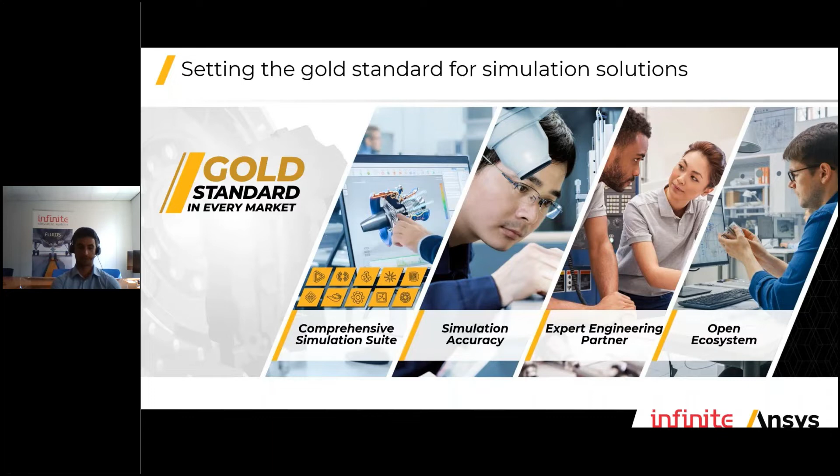So when you think of simulation, and that will be, I think, a recurring theme today - in the past, simulation was maybe seen as something you would do at the very end of the development of a product, or something that would only be dealt with by a couple of people with a very solid background in that specific domain. Whereas today, simulation is being used more widely in the product development process. It really starts at the ideation phase with some mid-end simulation technology that allows engineers to already understand how a product will perform, even if it's still in an ideation phase, which helps develop products better earlier in the process.

Typically, if you would do a simulation at the very end and see that something is wrong or you need to change something, the cost of that change will be very high, because you've maybe already spent some weeks developing it, or maybe you've already built a prototype. So simulation can really give some insights earlier on that you might not have had before.

Also towards the operation of a product, when a product is already manufactured and is in service, you see that more and more companies are leveraging analytics with measurement data, with sensor data, to be able to use that data from the field to couple it back to their simulation models, to predict how the actual product will perform in the field.

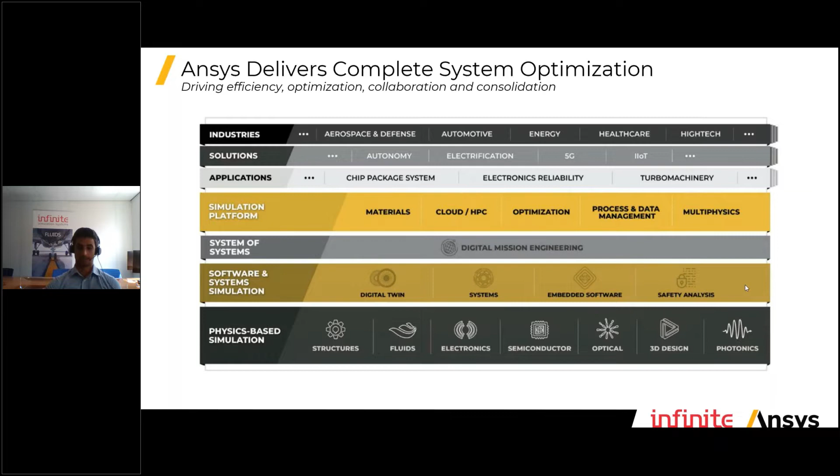There it is. Now zooming into the second tile, which is CFD, and I guess most of you know what CFD is, but maybe bringing it back to the basics. CFD stands for Computational Fluid Dynamics, and is basically the science of predicting fluid flow, heat and mass transfers, chemical reactions, and these kinds of phenomena.

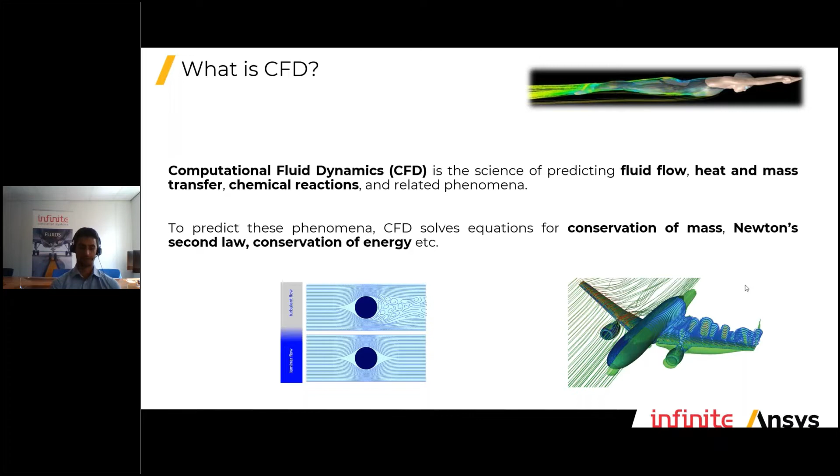We do that with computer simulations, with software, and basically with these types of simulations, what you're actually doing is solving a set of equations, which can be conservation of mass, second law of Newton, conservation of energy, etc. And with that, you can tackle a whole range of applications.

Distribution of multiple phases when dealing with multi-phase applications is another area where CFD can play an important role. Also looking into chemical reactions and combustion processes, for instance in the process industry, CFD is used a lot to understand how these reactions take place, and for instance, how pollutants are emitted or how you need to capture those pollutants.

CFD, as I mentioned at the beginning of the presentation, is not only used at the very end of a design to validate it, but it's being used more and more in all the different stages of the engineering process, of the product development process.

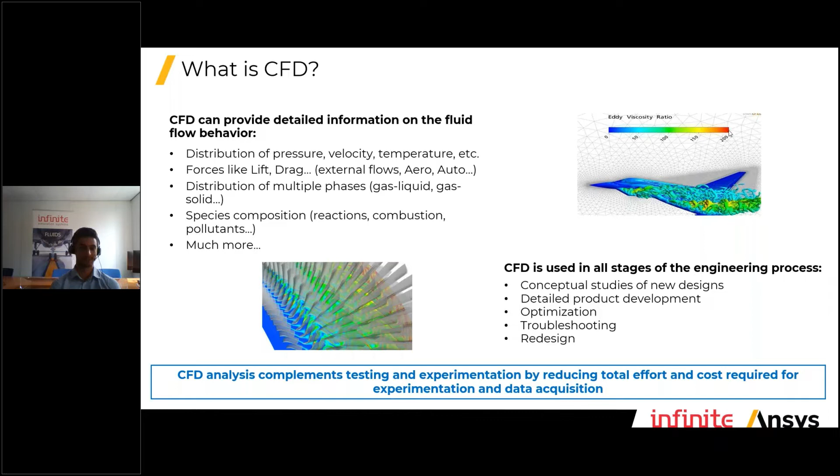So now, yeah, I can manage. Yeah. Thank you. Yeah, you're welcome.

So, how CFD pushes the boundaries in industrial applications. Adrian and Erna have been so nice to give an introduction, so I will not spend a lot of time introducing myself.

I studied civil engineering at KU Leuven. I did also my PhD in civil engineering, building physics, and after a postdoc in Montreal, I applied for a job at Eindhoven University of Technology, where I've been working now, I think, almost 16 years, and still happy to work there. I'm also now part-time working at KU Leuven.

The objective of this presentation, it's also the question I got, is to tell something about the power of computer simulation for a wide range of applications. What I would also like to demonstrate is that although scale-resolving approaches are intrinsically superior to steady RANS, steady RANS, and sometimes unsteady RANS, are still the most applied method.

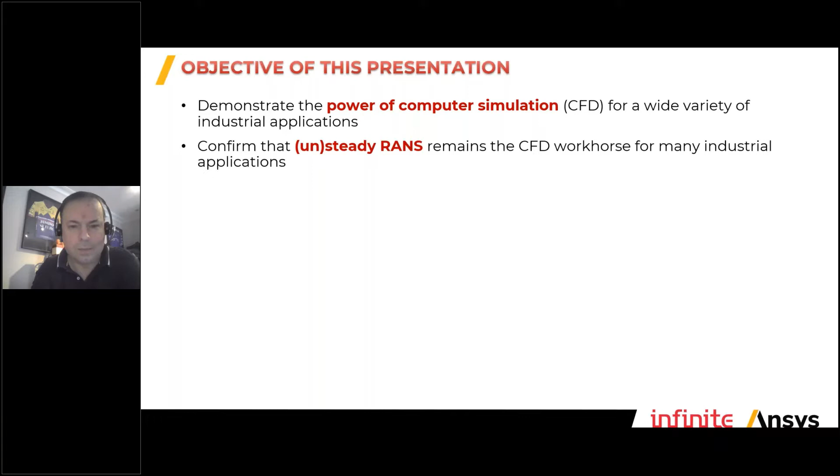And I'll have a list of applications that I'll run through together with you, starting from the ventilation system for a Duvel beer brewery and then ending up with some cycling applications. The ones you see here in blue are performed with scale-resolving simulations, and the ones in black are performed with RANS simulations.

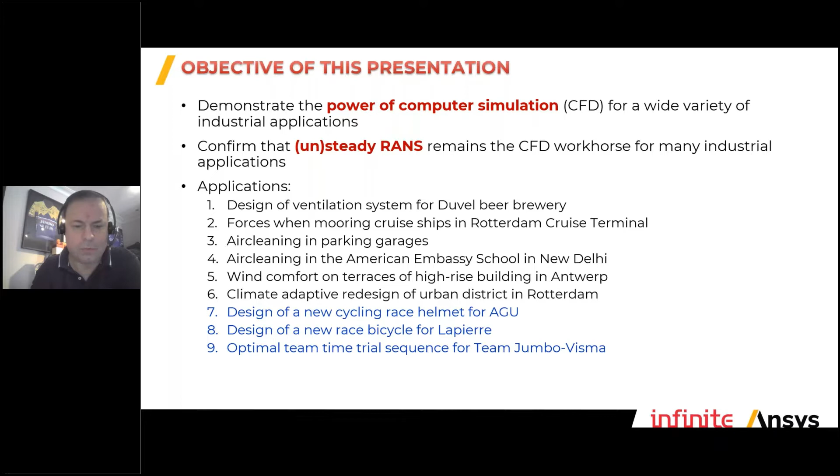I would like to start with a quote here, and I think this is a very nice one: How can it be that mathematics, being after all a product of human thought independent of experience, is so admirably appropriate to the objects of reality? That's really true, huh? Because mathematics was invented by us, by people, and it's surprisingly accurate often to predict real things.

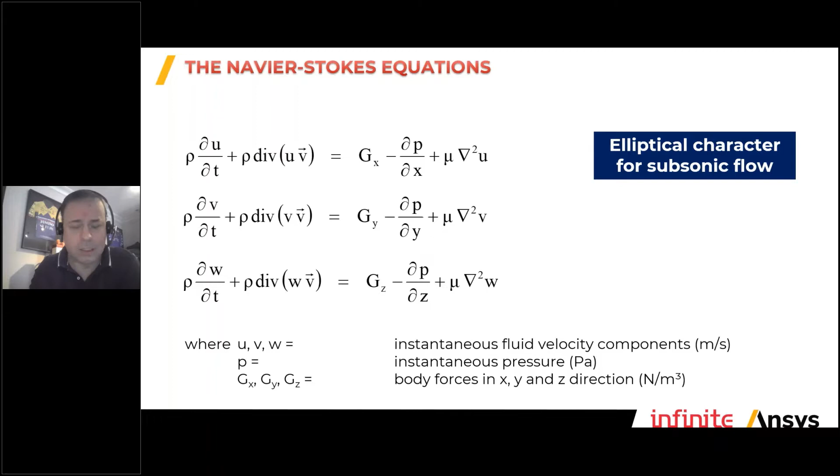I often tell my students that this is one of the most beautiful things they will probably ever see. These are the Navier-Stokes equations. They fit on one slide. It's a simplified form because this is for an isotropic homogeneous Newtonian fluid, but nevertheless these equations can predict a wide variety of fluid flow processes, whether it's the air in your respiratory system, wind flow around buildings, or the flow of blood in your veins, all predicted by these equations, fitting miraculously almost on a single slide.

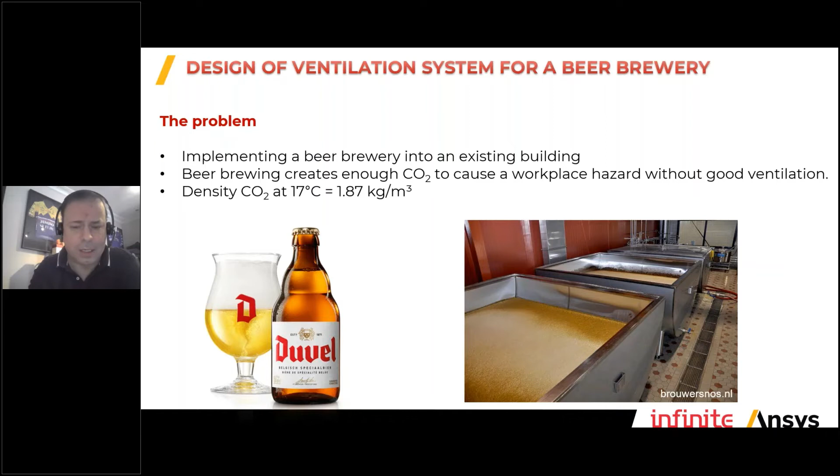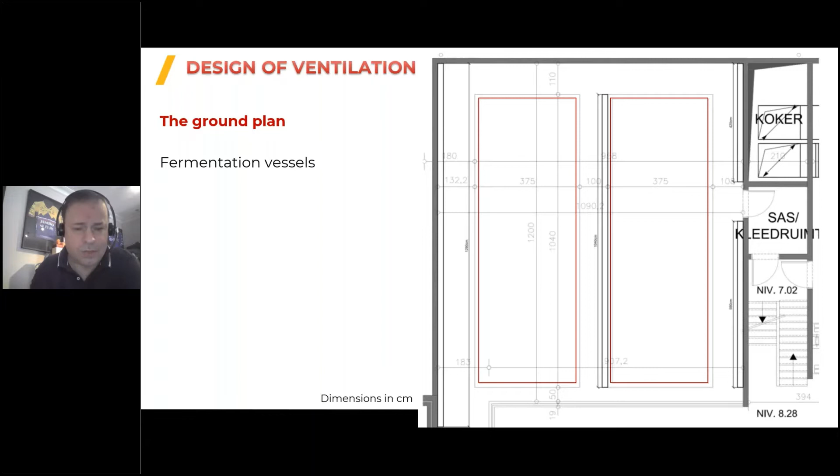Simulations were made here, nothing too fancy - steady RANS simulations with the SST k-omega model with proper boundary conditions in terms of heat generation and CO2 flux. Specific conditions were analyzed: different temperatures, also different inlet velocities, resulting in different ventilation flow rates.

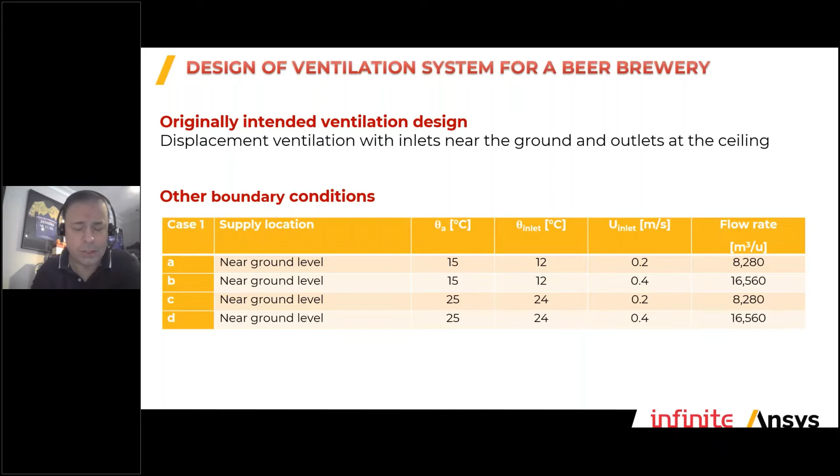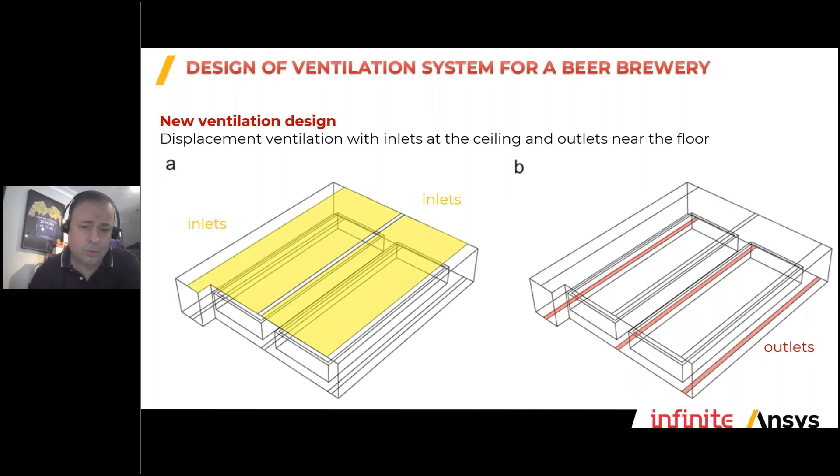So this would not be a good ventilation system, and knowing that CO2 is heavier than air, it's not surprising that with this kind of ventilation system you cannot really expel the CO2 properly out of this room. Another case is the reverse - also displacement ventilation, but from the ceiling down to the floor, which makes more sense given the density of CO2. This is an extreme case where we would be able to have very large inlet planes - very difficult to achieve in reality, but let's just look how far we could get here.

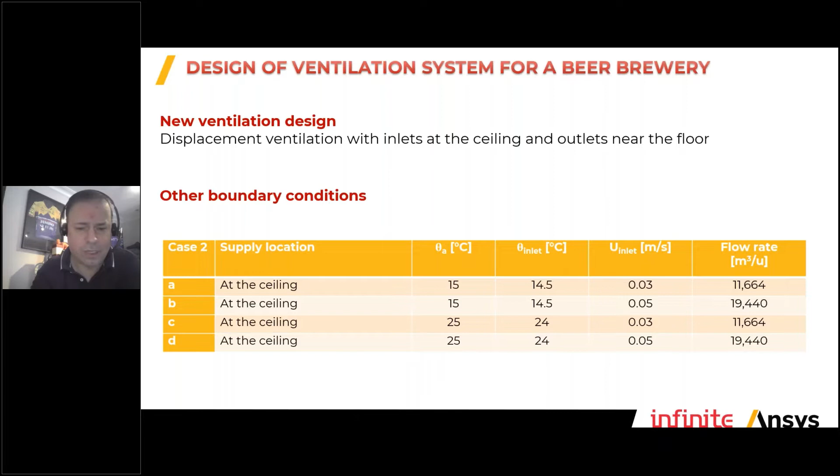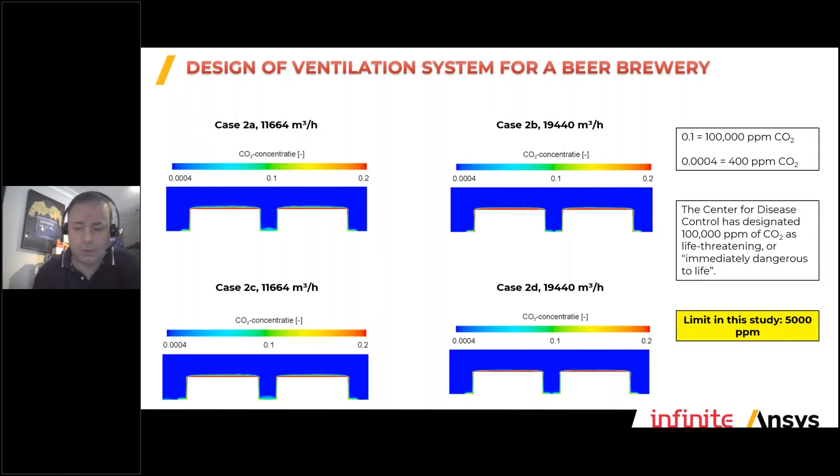Again looking at different configurations, different inlet velocities, flow rates, and so on. Here you get actually the opposite situation - very low concentrations. But as I said before, this is not really a feasible approach to design ventilation inlets.

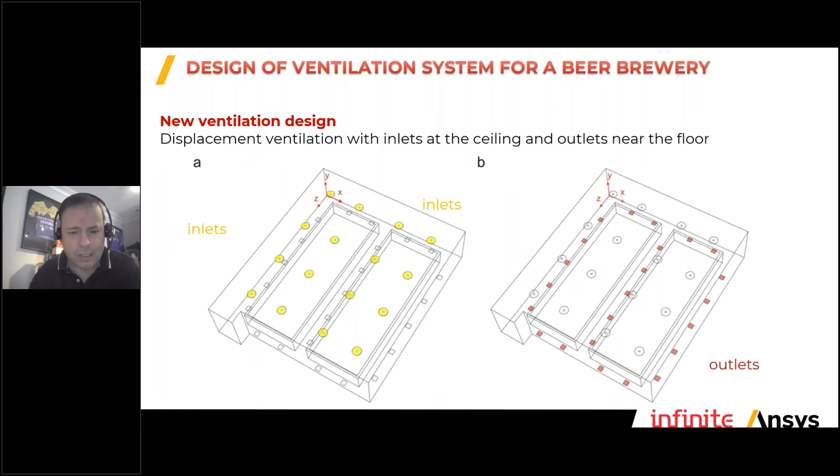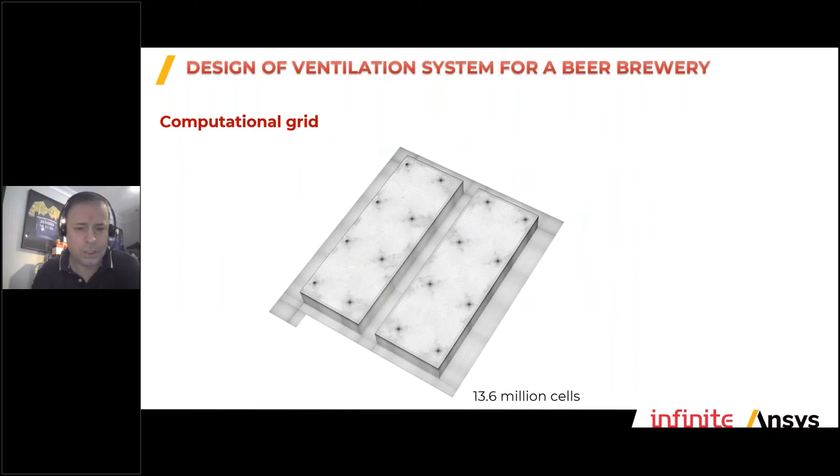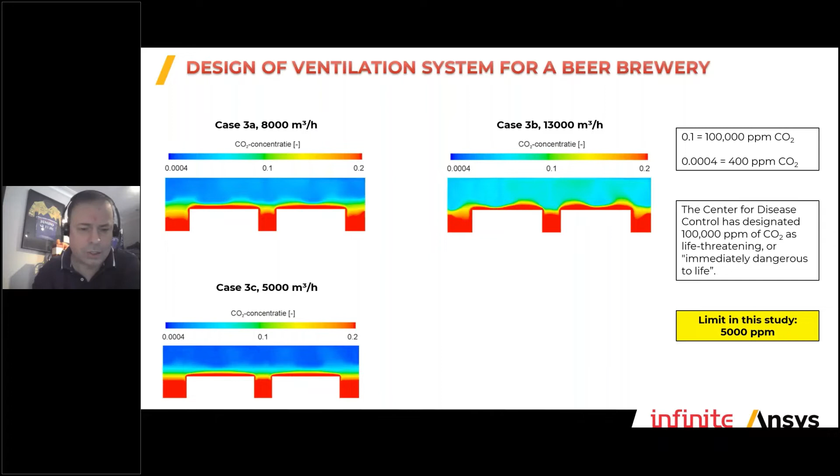So finally we ended up, after a bit of optimization, with this kind of configuration of inlets at the ceiling and outlets at the floor. Again with similar types of simulations with different boundary conditions, that gave a rather okay view, as you can see here. Still, at some locations concentrations will be a bit too high, and then the idea is to turn up the ventilation depending on local concentration measurements. So this is an illustration of ventilation, but in a rather peculiar and specific case.

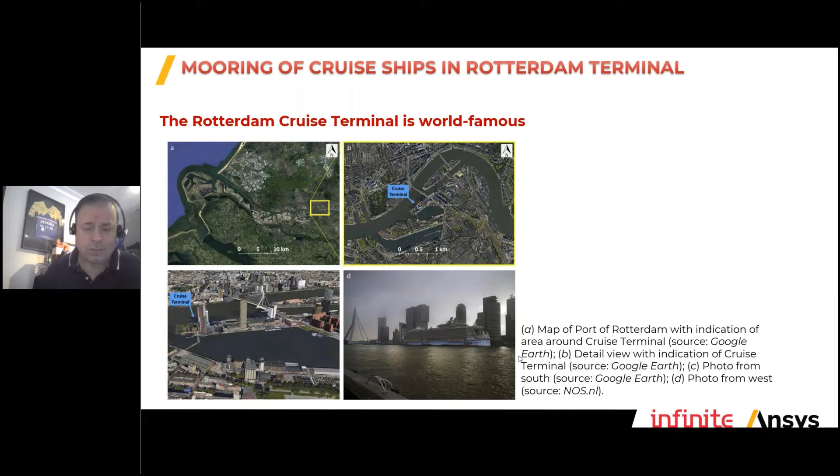You can see it here at the top left figure - this is the Maasvlakte in Rotterdam, and then you have the cruise terminal further inland. At this location, zooming in here, you see a much larger ship being moored at the quay.

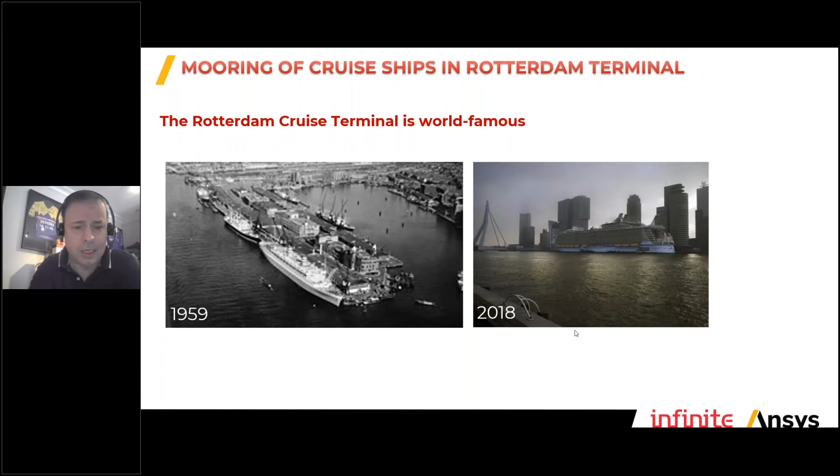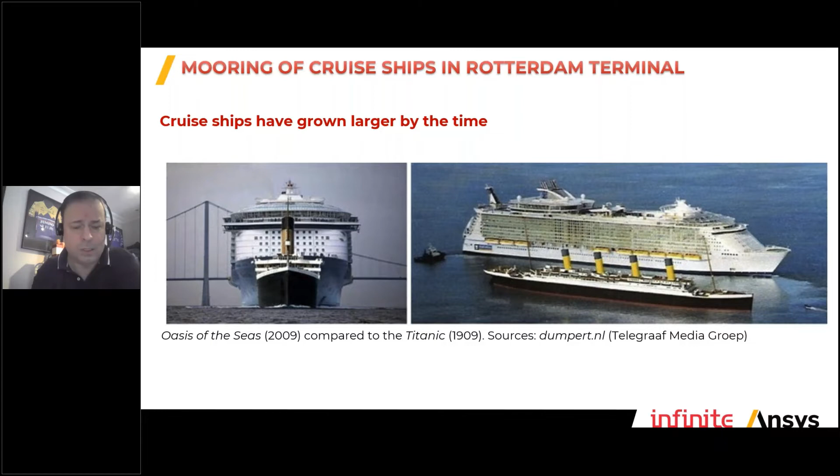But larger ships also mean more windage area, so larger wind forces on the ships. If you then have this ship at the cruise terminal where there are also high-rise buildings, the buildings also influence the flow - so the high-rise buildings will have an effect on the forces on the cruise ship, and vice versa.

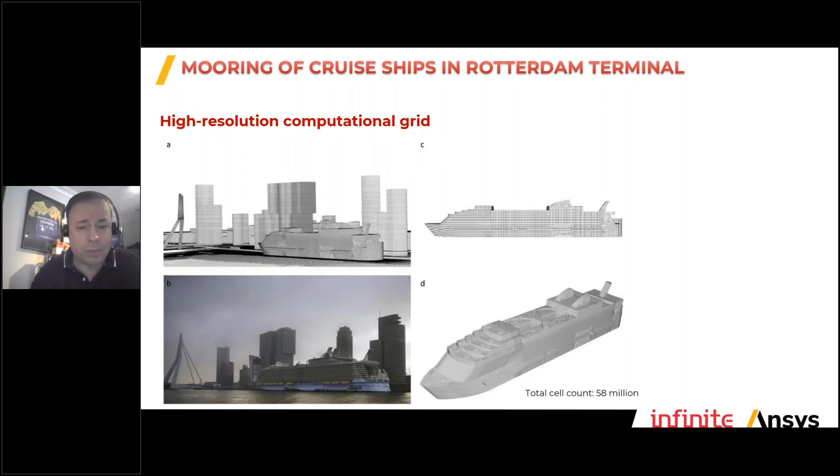So this can be an issue, and that's why we did simulations of this whole cruise terminal area. You see the computational grid here on the right side. Also the ship was included, and for other simulations it was excluded, to really see the effect that the presence of the ship would have on the buildings present there, and also on wind speed at pedestrian level. Steady RANS simulations were employed that were validated with wind tunnel measurements of forces on the ship.

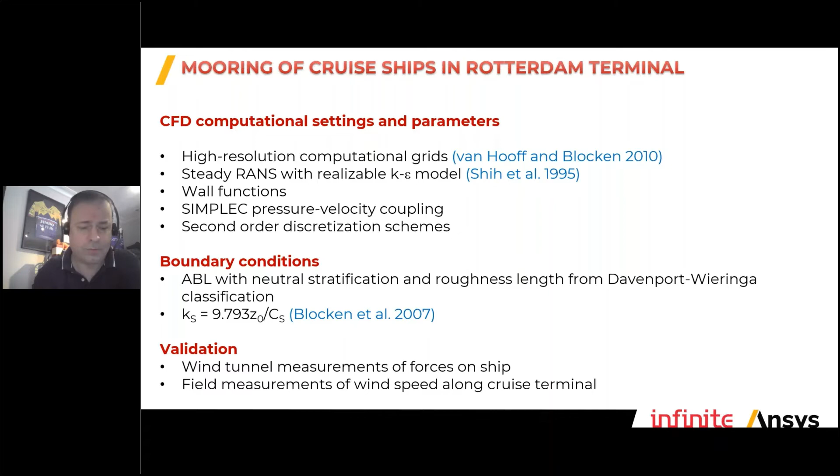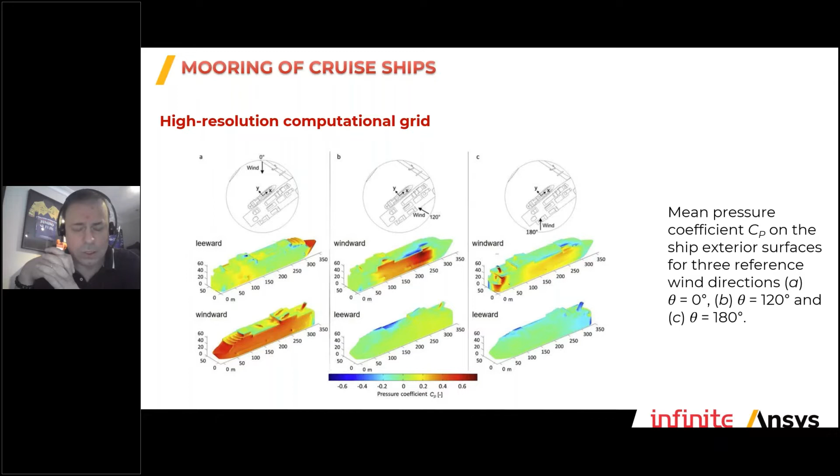Because, as you know, regularly there are accidents with cruise ships, with container ships, either near ports or in narrow canals. I remember the Ever Given situation in the Suez Canal, and unfortunately these are not such rare occasions, so that's why this kind of study can be important. An article was written about that - if you want more information, you can find it there.

So these are very small particles, usually invisible to the naked eye, and we characterize them by an indication PM, particulate matter, with a number. PM10 means all particles with a diameter equal to or smaller than 10 micrometers. So you have particulate matter, finer particulate matter, and then PM1 is even finer.

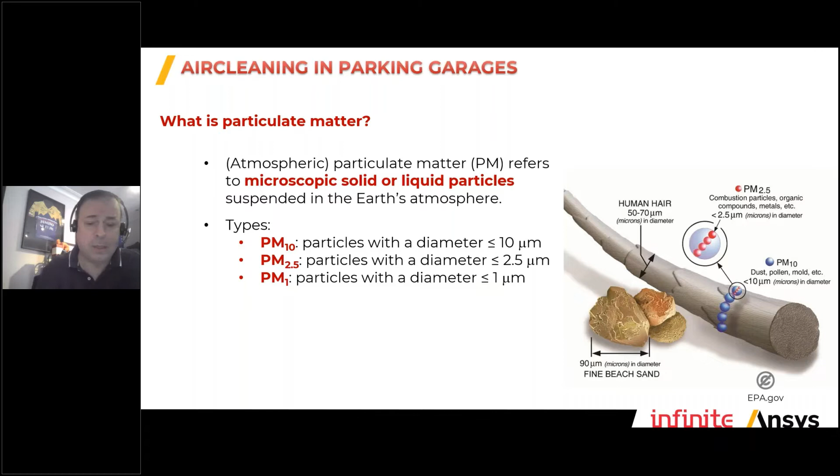So what is the problem here? If we inhale these particles - well, PM10 has been around as long as the planet exists, you get PM10 from dust storms, sea spray and so on. And the human respiratory system has evolved over many centuries to expel these particles, so your respiratory system will take care of that.

But due to human activities, think about combustion processes and so on, smaller particles are generated - particles that can then get into your lungs. Even smaller particles can get into the smallest components of your lungs, the alveoli. And even smaller particles are so small that they can actually pass through the cell walls.

They get into your blood, and because your blood goes everywhere, the particles also go everywhere. And indeed, post-mortem research has found metal particles in the brain of people. These particles are not supposed to be there, and that's also why particulate matter has been linked to all kinds of diseases, including Parkinson's and Alzheimer's disease.

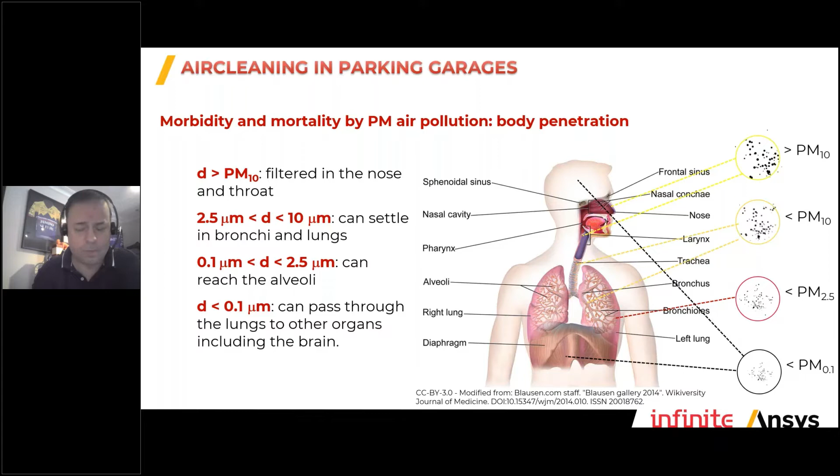So this is something we need to take care of. We get a lot of these particles, certainly in cities where there's a lot of traffic.

We worked here together with the company ENS Technology, and they manufacture large air cleaners by electrostatic precipitation. What does it mean? You charge the particles with a positive charge in this case, and then the particles are attracted to a grounded plate, and there they are collected.

When you keep the system running, for example in a parking garage where high concentrations can occur, the metal plate where the particles are collected will first be gray, but over the course of days it will become dark gray, and then it will become black.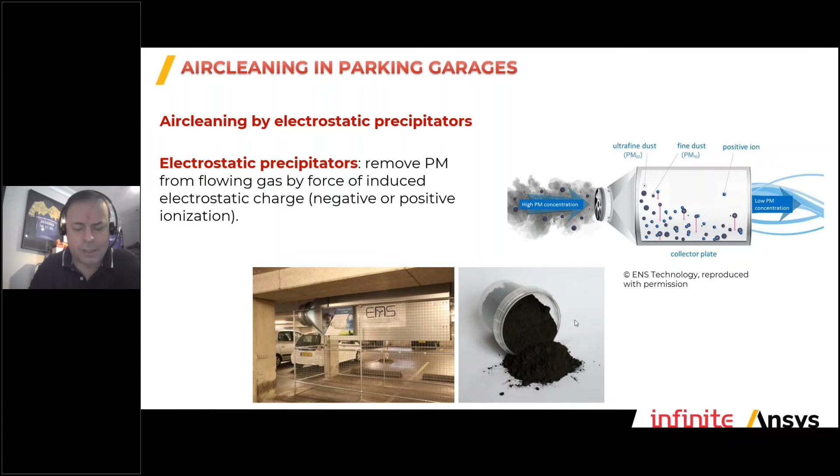You have to imagine that this is what we are inhaling. Well, not this amount, of course, and certainly not on a daily basis, but this is something that is of concern. The World Health Organization finds this the most problematic and most carcinogenic air pollutant. So we need to take care of that.

What we did here actually was a nice idea by this company, ENS Technology, to put this kind of air cleaners in parking garages where a lot of particulate matter is generated, and then to try to first clean the air inside, but also to have an effect on the outdoor environment. Because otherwise, when we ventilate the parking garage, we just flush the particulate matter back into the open, and we move the problem outside.

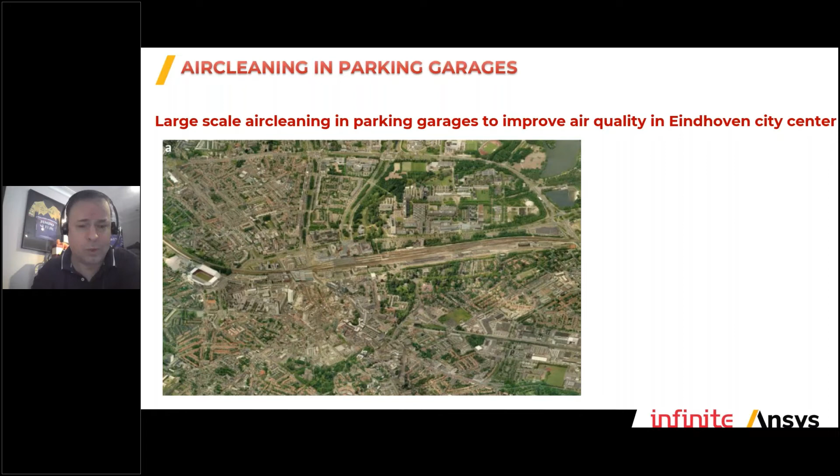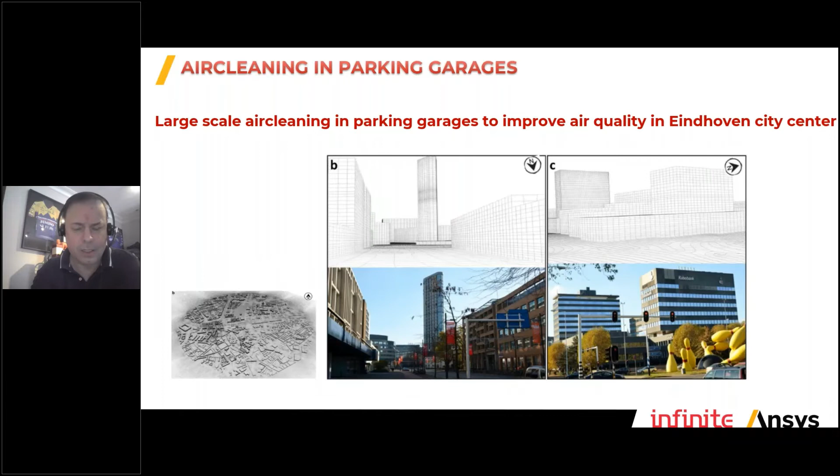So also here we made a large computational grid of Eindhoven city center, the whole part inside the circular road around the city. You can see here that some buildings were simplified a bit, but the main shapes important for aerodynamics are present.

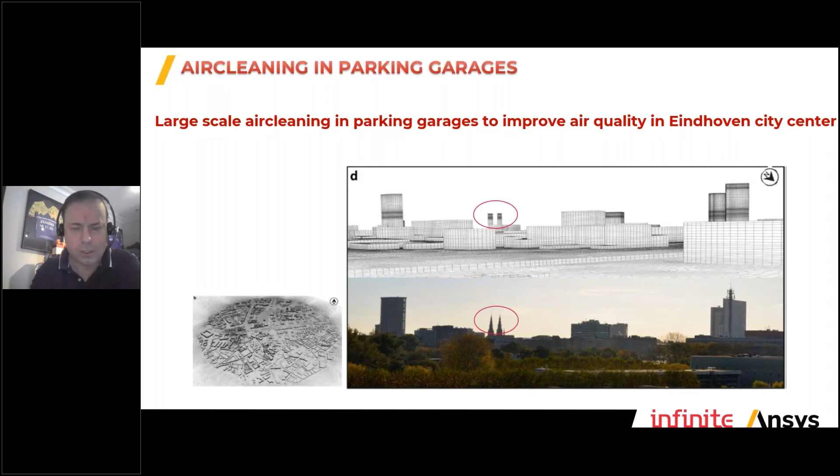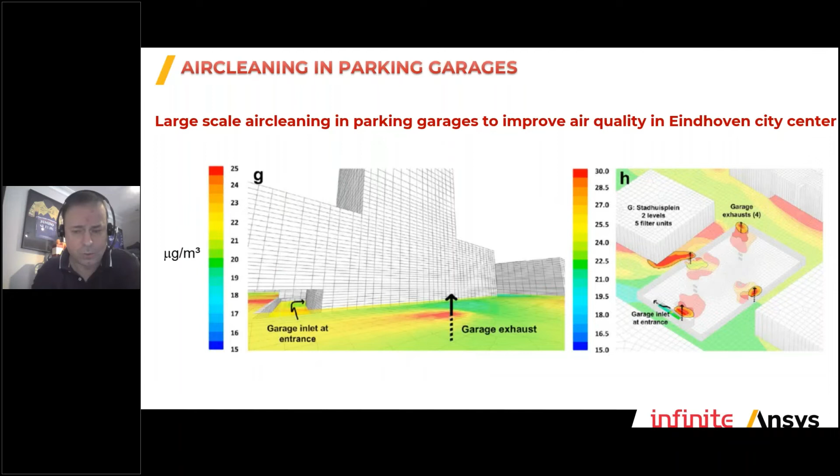Sometimes simplification was maybe a bit less polite. Here we were a bit less respectful towards the church, but in good Christian tradition, I hope that they will forgive us for that, for the sake of grid quality. Here you see some ventilation openings of specific parking garages. A lot of dedication was made to modeling these underground parking garages and then the air cleaners inside.

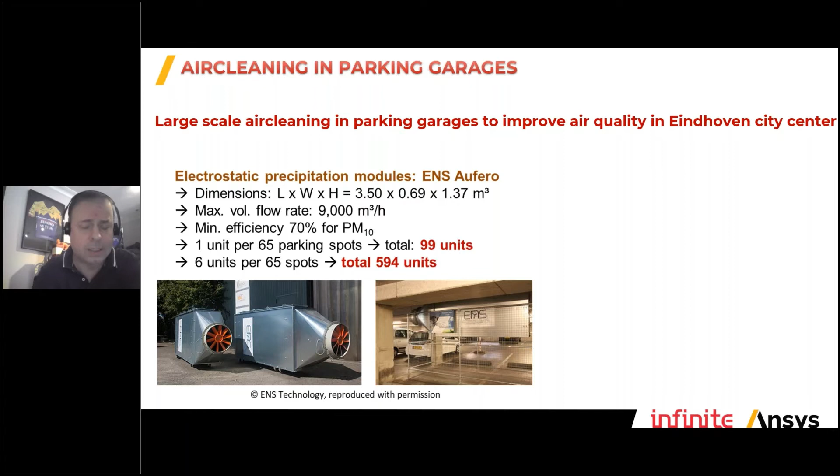Then we had two cases, well, three cases actually. One was a scenario as it was, so without air cleaners in parking garages. One was with 99 units spread over a part of the city center. And the other case was almost 600 units spread over the same area.

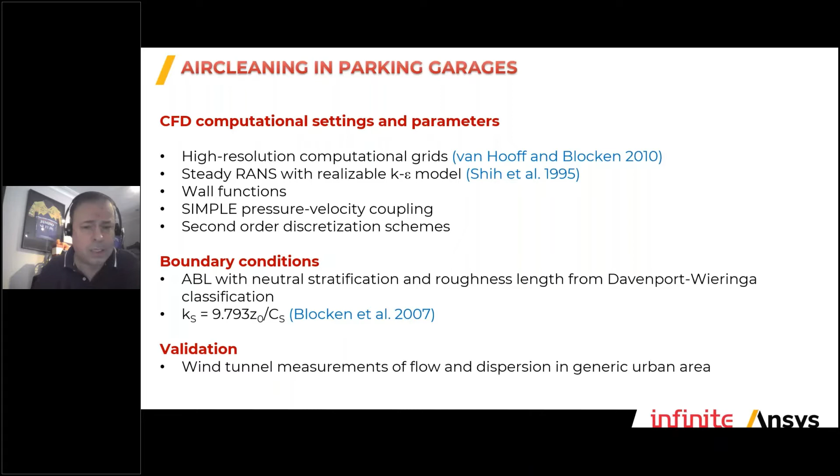Also here, steady RANS simulations, realizable k-epsilon model, so nothing too fancy, but also validated with wind tunnel measurements. And then finally here some results.

But it has been repeatedly shown, demonstrated, and published in medical journals that even if you reduce particulate matter concentration a little bit, this already can be translated in less morbidity, less mortality, and so on. So these concentrations, no matter how small they are, these reductions, they can be important.

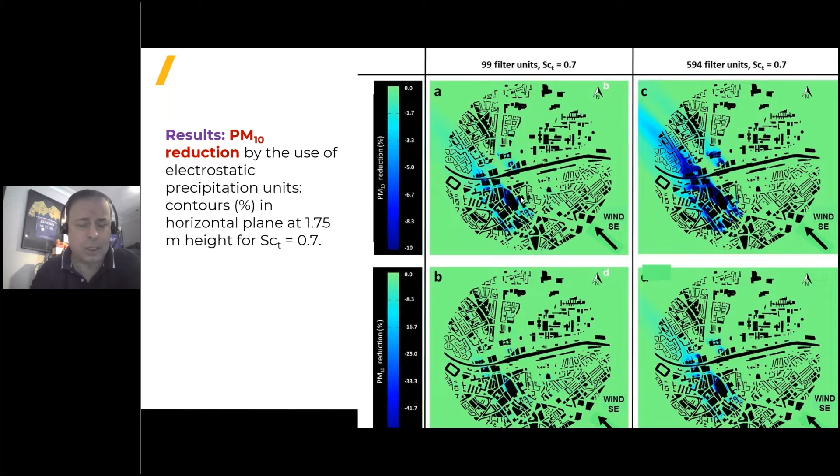The same study was done in New Delhi, where particulate matter concentrations and air pollution are a big issue. Here we focused on the American Embassy School, together with our partners in this project. That's a school with a courtyard, and the ventilation of the classrooms, where children are present for a large part of the day, draws air from this courtyard. So our thought was: this courtyard is partly enclosed. If we can purify the air inside it, the air going into the school will be cleaner, and that will be healthier for these kids.

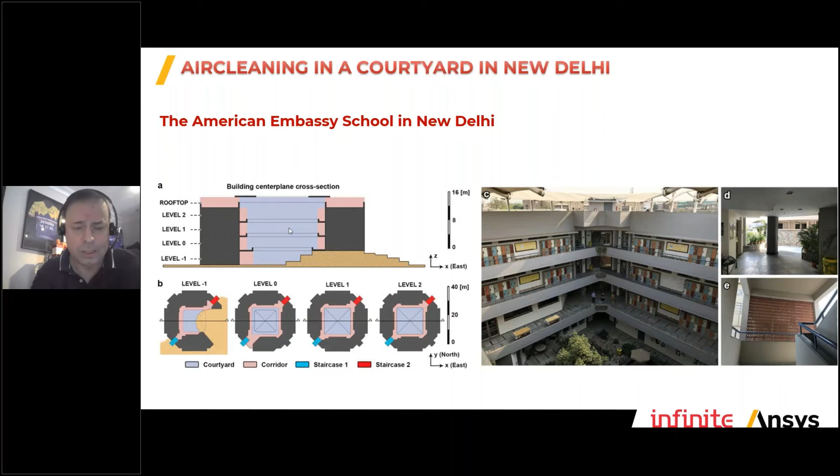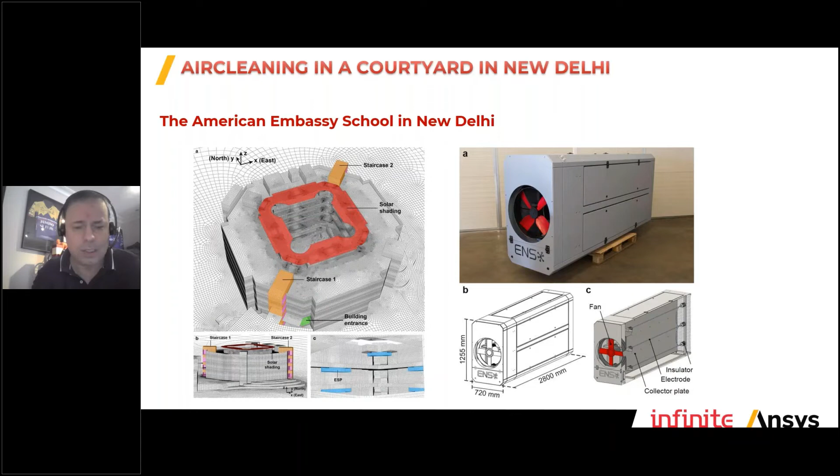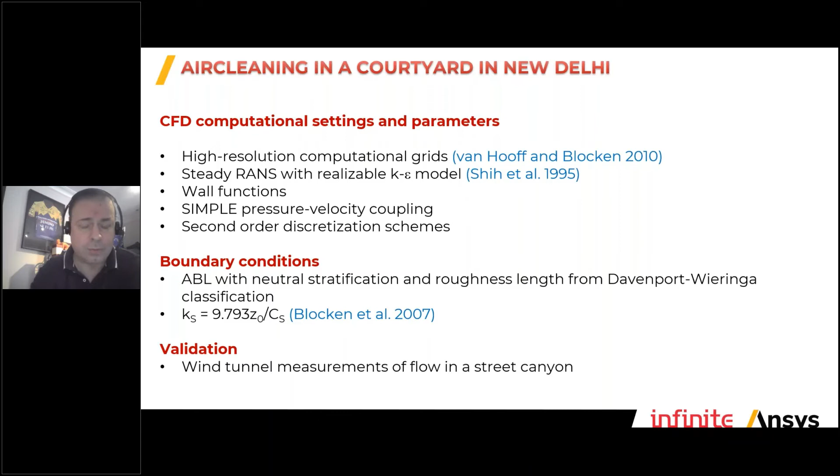And indeed, that was done. Measurements and computer simulations were made beforehand to decide how many systems we needed and where, so these large units were installed. Again, steady-state simulations were used, because as is sometimes said, a model should be as complex as needed, but not more complex than that.

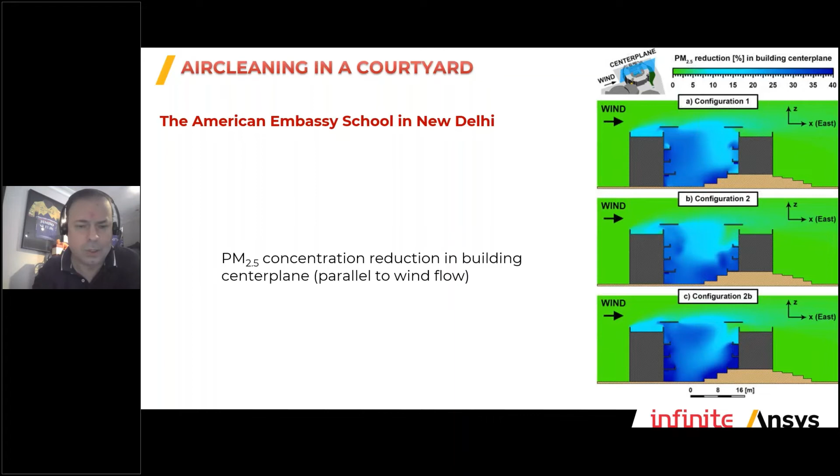Steady RANS here, after validation, proved to be sufficient. Here you see reductions in PM2.5 concentrations inside these courtyards, with reductions at some locations of up to 40%, which is a big improvement. The system has now been implemented, tested, and measured with good results. Our PhD student Rob Vervoort, who did the computational study with us, also published an article about this.

A different application is wind comfort at terraces of a high-rise building. There's not much information about wind comfort on terraces, but it is an issue, since high wind speeds can occur for high-rise buildings. At some point we were contacted by an architectural and engineering company, ELD Partnership, who had made a special design of a building facade — a second facade that's partly open, partly closed, in this checkerboard pattern you can see here.

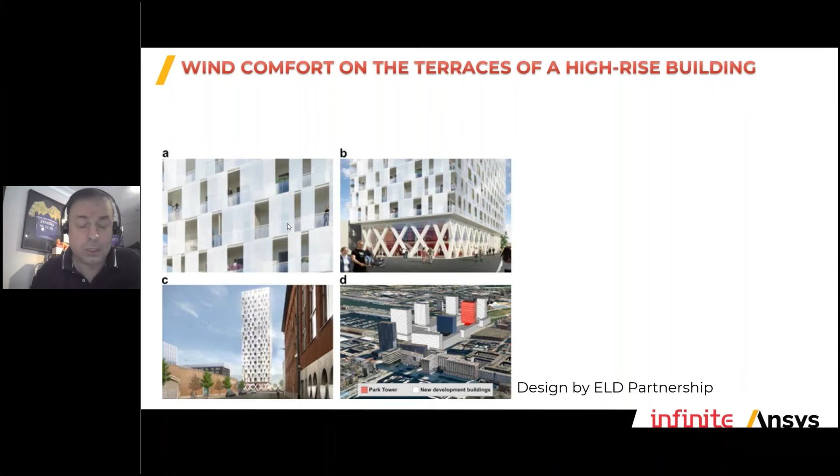They wanted more information about the wind comfort on these terraces. This is something that should be studied with CFD, because if you put it into a wind tunnel and scale it down, the details become so small that flow which is turbulent in reality might become laminar. So this is really a case where simulation needs to be engaged.

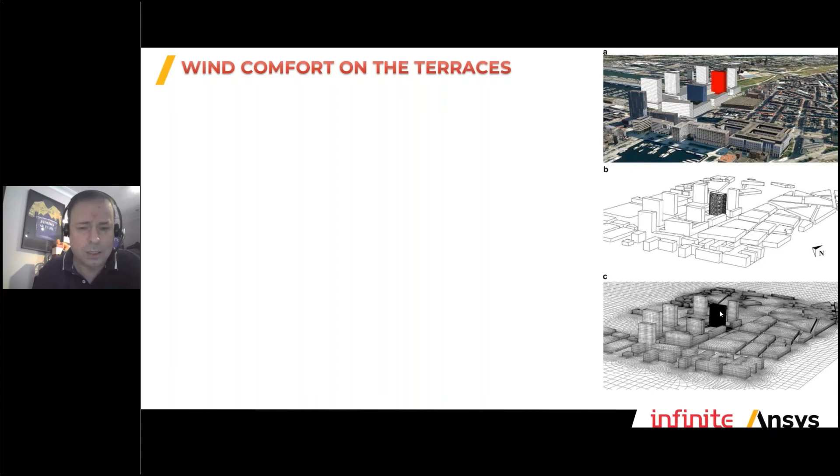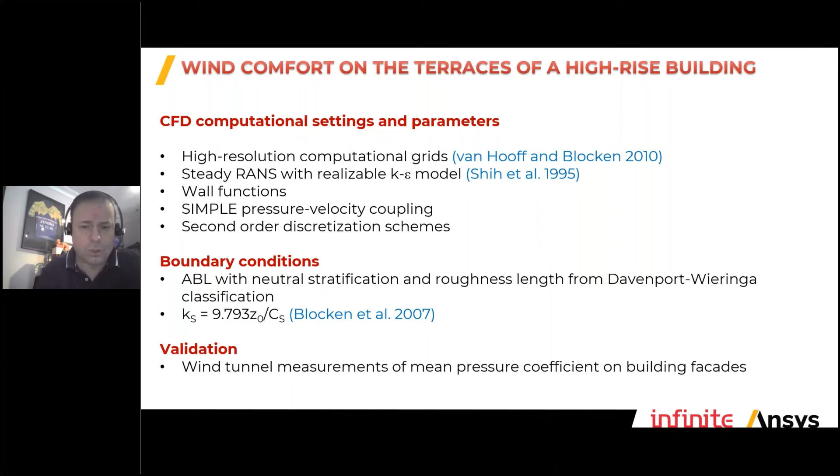This Park Tower in Antwerp is shown in red in the top figure, and you see the mesh in this black area. The cell resolution had to be quite high there, because we had to model all these components in the checkerboard pattern. What you get, finally, if you run these simulations — again steady RANS simulations — so again, the workhorse of industrial CFD in action.

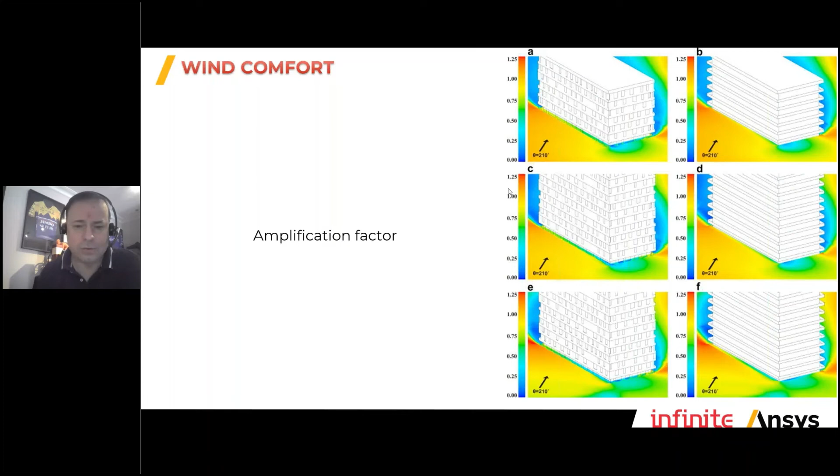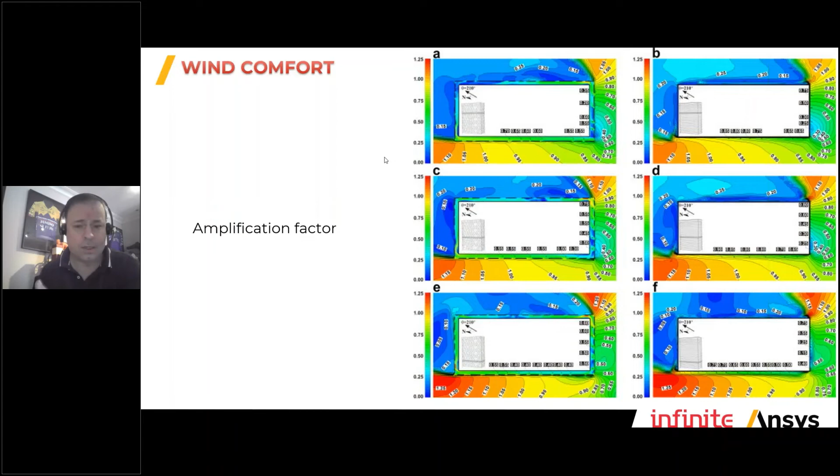You can see that more clearly from a top view. This is again the amplification factor, a dimensionless wind speed. Here you see quite high velocity, certainly on this side. But if you focus on the area of the terrace between the first facade and the checkerboard facade, there's some kind of pressure equalization occurring that leads to lower velocities. So this checkerboard pattern idea by the designers is very good — it's a solution that helps improve wind comfort on these terraces.

These days, there is quite some attention to heat stress in cities, and there's a reason for that: it's expected that heat waves will happen more frequently and be more intense. This also has impacts on the health and comfort of people, and on building energy consumption, particularly when we think about active cooling.

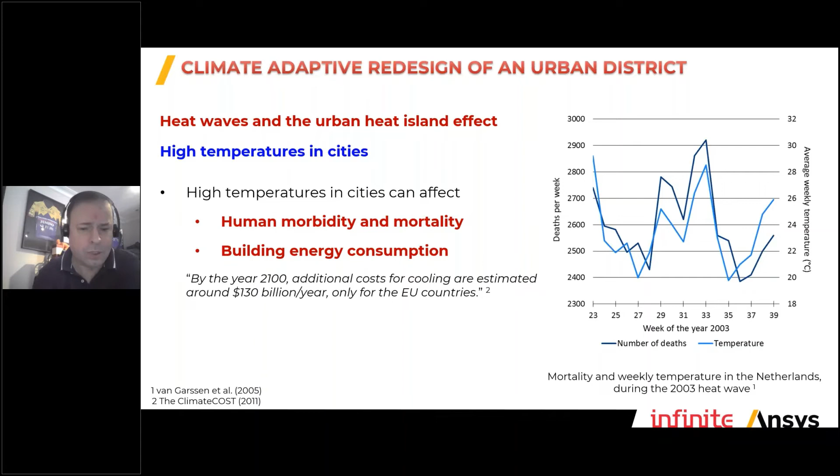Different physical phenomena are involved here: the reduction of wind speed, the amplification of shortwave radiation gain, and the lack of vegetation and water ponds or water surfaces in urban areas. This is sometimes referred to as the urban heat island effect — the fact that inside an urban area, temperatures can be substantially higher than in the surrounding rural area.

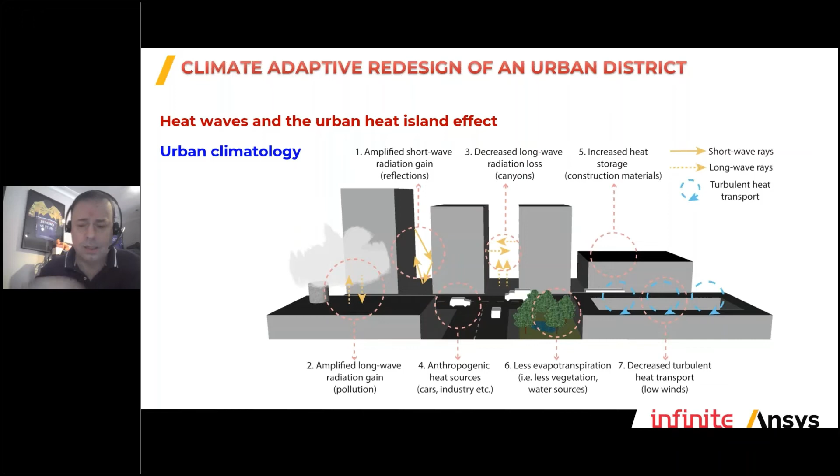So this is also an example where CFD can be engaged. We did this for a district in Rotterdam, where the task was to think about climate adaptation measures, to be able to reduce heat waves inside this area.

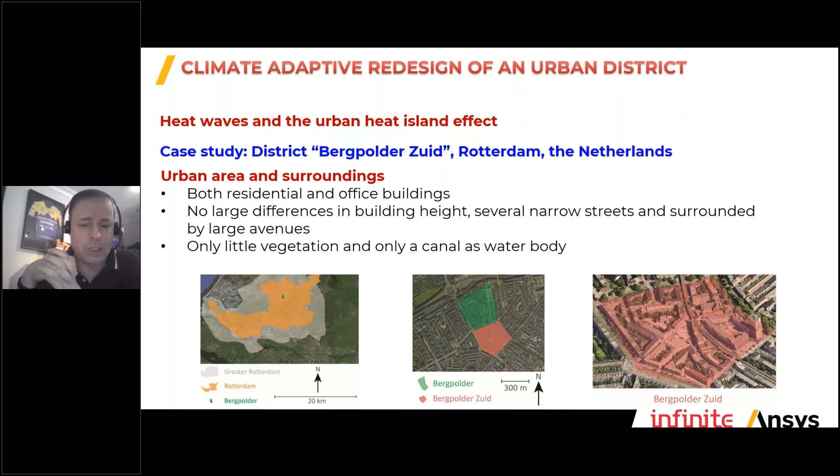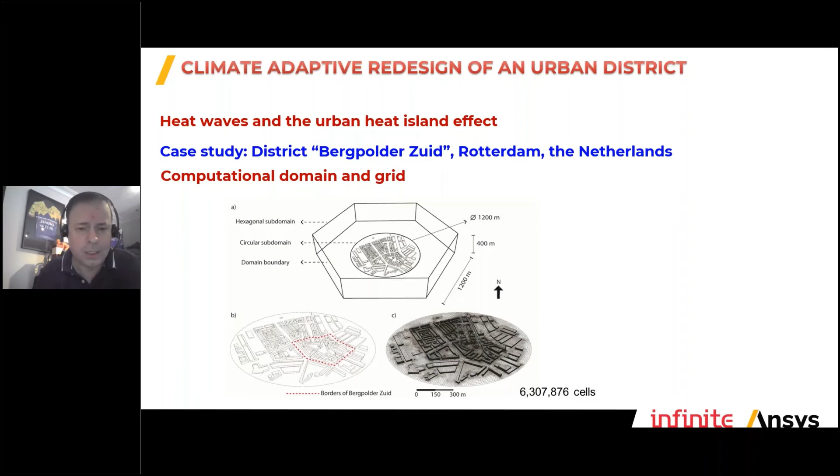This is part of the computational domain, and you also see the computational grid there. We focused on a heat wave: 2006 was a period where many people in Western Europe died because of this heat wave.

You can model with CFD how your surface temperatures and air temperatures change over several days. This is an example of surface temperatures in the morning, at 5 o'clock, when you see the buildings in light blue are still a bit warmer than the surrounding ground area.

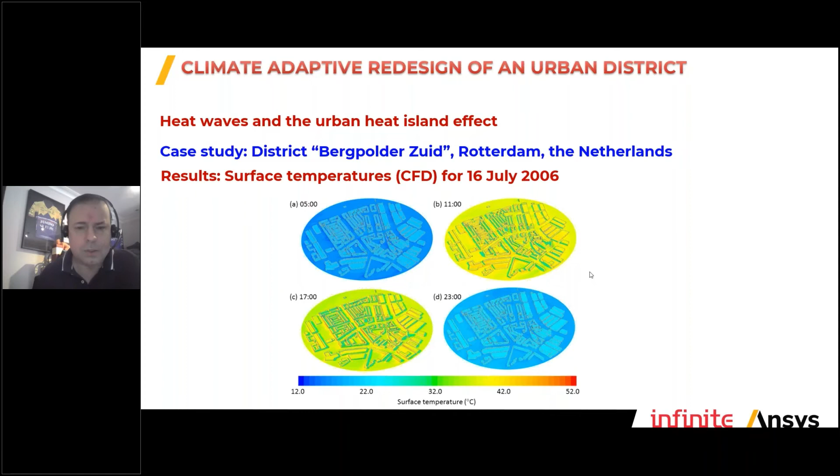Then the sun comes up and starts heating the buildings, heat is accumulated, and that increases over the course of the day. Finally, when the sun goes down and nocturnal radiation sets in, the same cycle starts again.

Even in our heat waves, Netherlands and Belgium are not famous for their fantastic weather. Even in heat waves we have some clouds sometimes, and that is reflected in the measurements but not necessarily in the simulations.

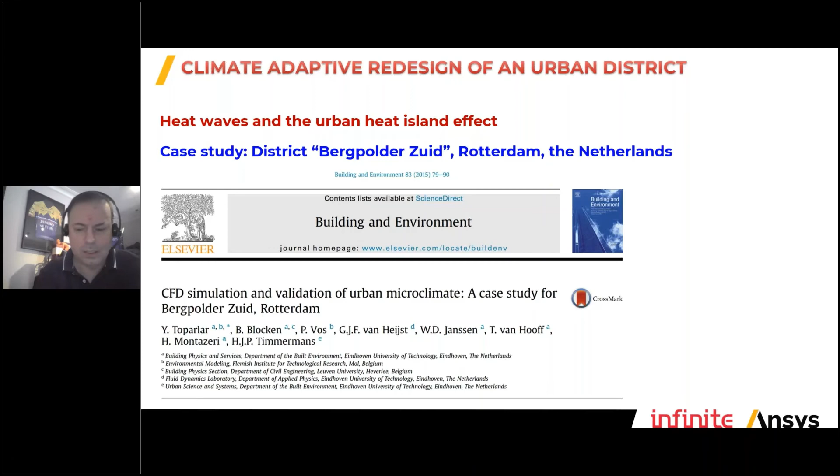The fact that we can predict heat waves and predict surface and air temperatures also means we can start predicting what adaptation measures can yield. A typical adaptation measure often mentioned is painting roofs and facades of buildings white so there is more reflection of sunlight and less absorption.

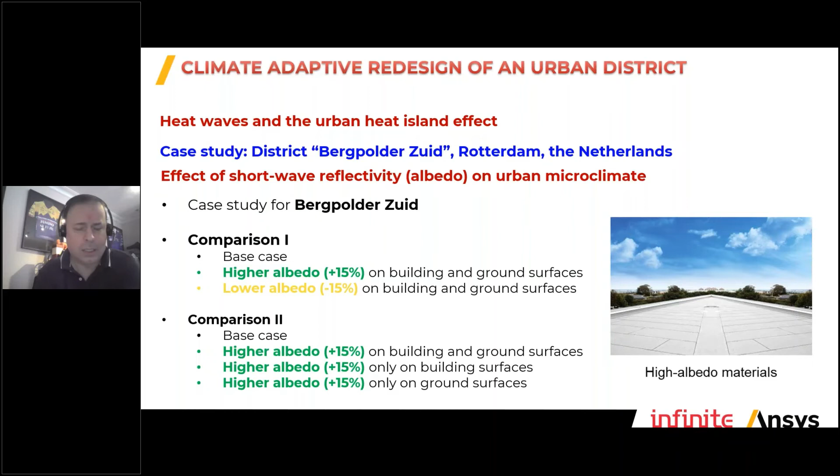This was also an exercise that we performed here. Depending on the increase of this shortwave reflectivity, you can see at the bottom different scenarios, showing that this can gain you a few degrees in terms of surface temperature, and not only for one building but for the whole area if you apply this reflectivity to all these places.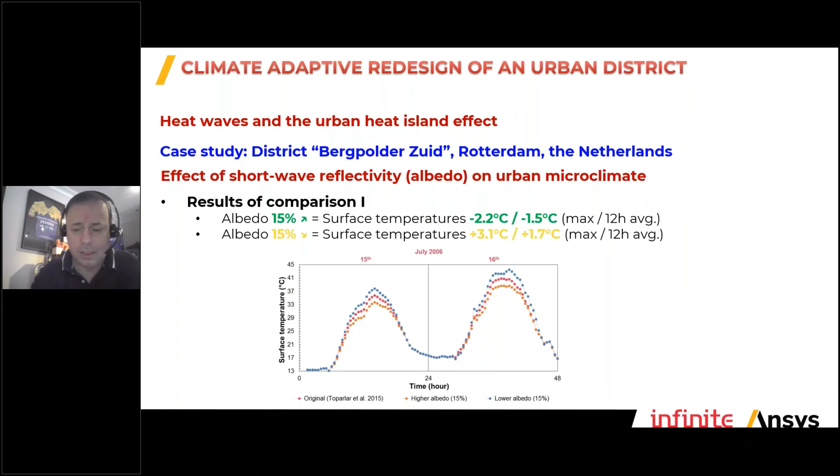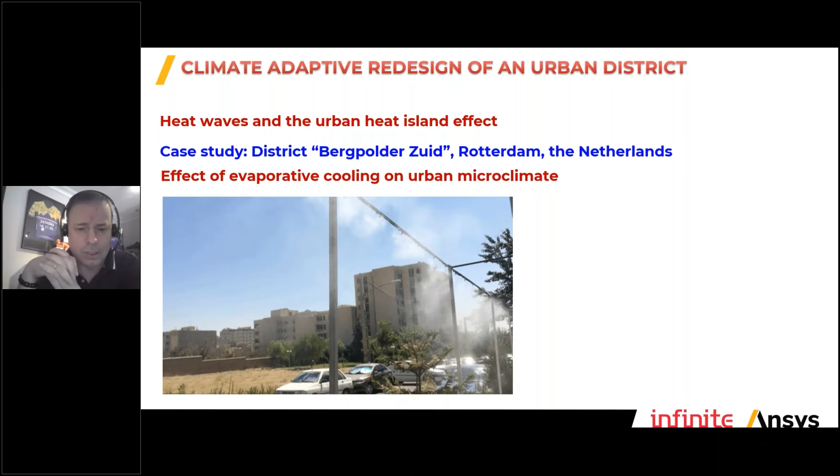There's also something we tested that looks a bit uncommon, and is still uncommon for many parts of the world: mist spraying. It's increasingly being used, releasing very small droplets into the air. Water needs a lot of energy to evaporate, so this extracts heat from the air and can cool it down substantially. This is an evaporative cooling system used in several countries.

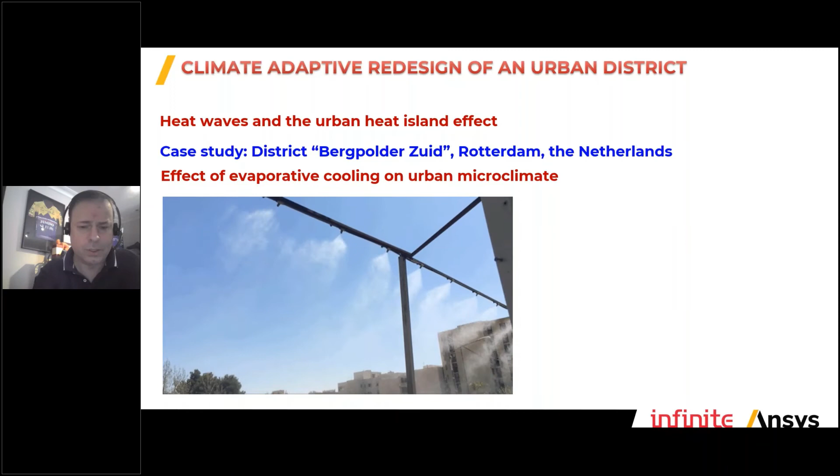A different type of application now as we move towards the end of this presentation. At some point we were asked by AGU, a company of cycling gear, to help them design a new race cycle helmet.

This is not a steady-state simulation anymore; here we really needed to take into account transient effects. The interesting thing about a race helmet is that to make it as aerodynamic and fast as possible, you should find a compromise between the air going over the helmet and the air going through it, beneath the helmet and the head of the person, with the latter also used for ventilation.

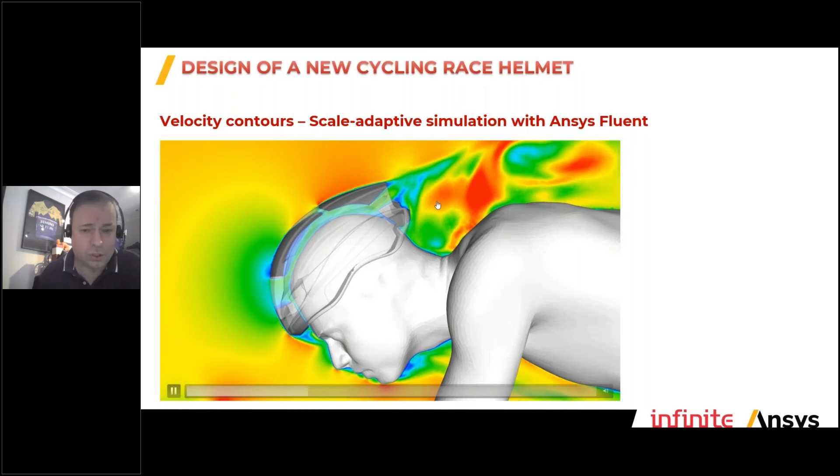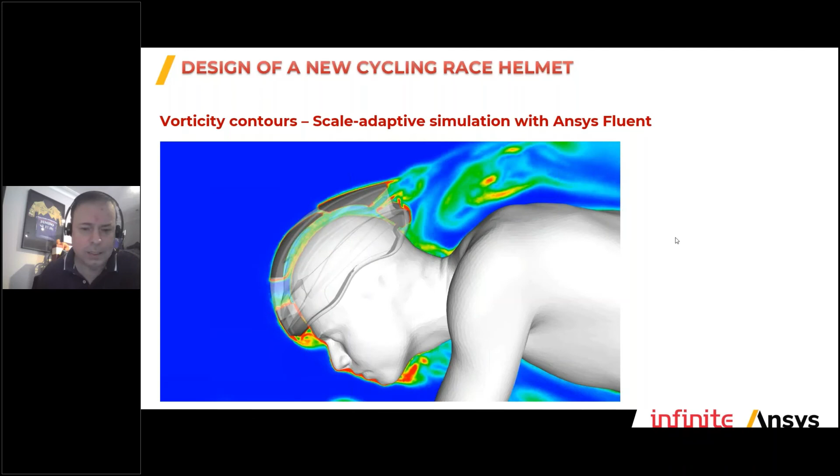So actually what we found here, what was really important in this design, and it's something we saw clearly from the simulations, is that if you would have a completely closed helmet, then behind, above the neck of the cyclist, there would be a large underpressure area, and that would cause a suction force that is not beneficial for the cyclist. If you guide a sufficient amount of air through the helmet, then this air coming out will actually reduce this suction. So you really have to try to fill up this gap with some of the ventilation air going through the helmet. This was an iterative design process that we did together with the company to arrive at the new helmet. And then finally they made a movie of that.

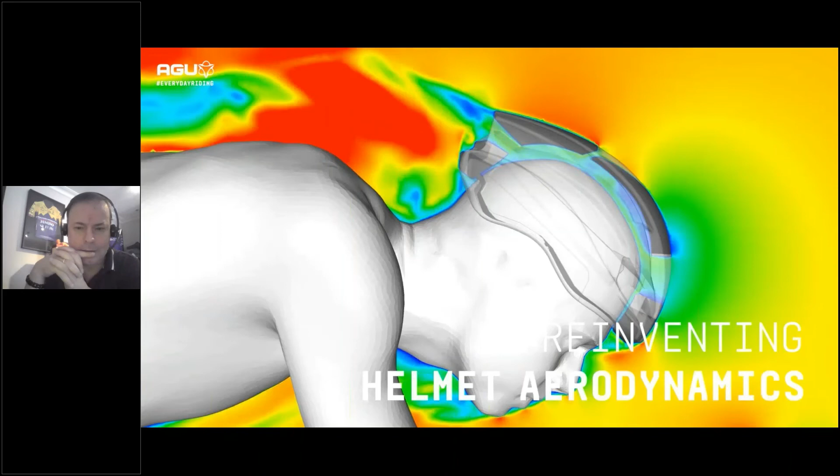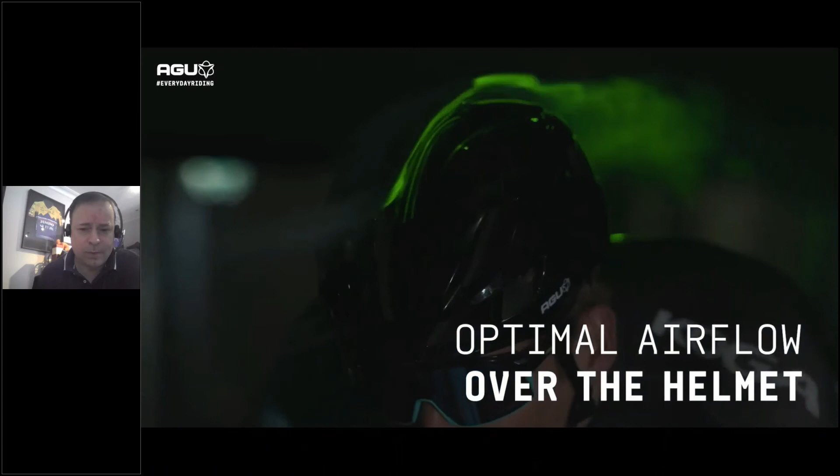I'll just very briefly play that for you, where you also see part of the simulations coming back, and you see the opening. Also in wind tunnel testing, you could actually see the same effect. This balancing of the flow and some other details are things you wouldn't think about when you see a helmet, but they're important for aerodynamics, and it's really good to apply simulation to see things that we would not expect to act in a given way.

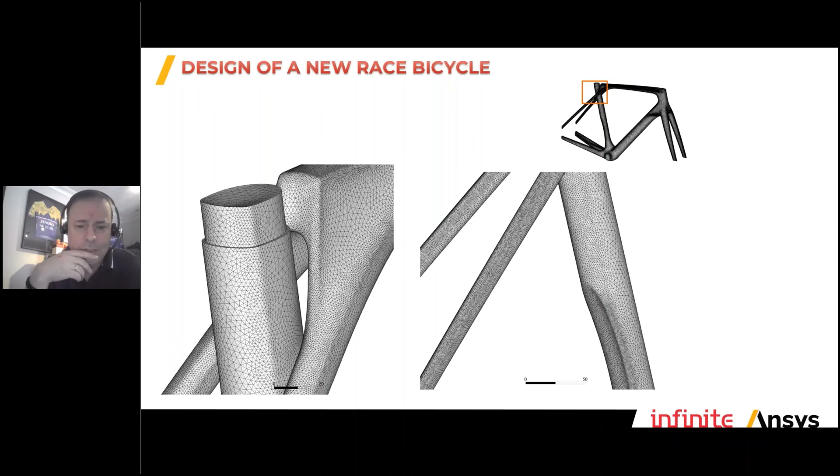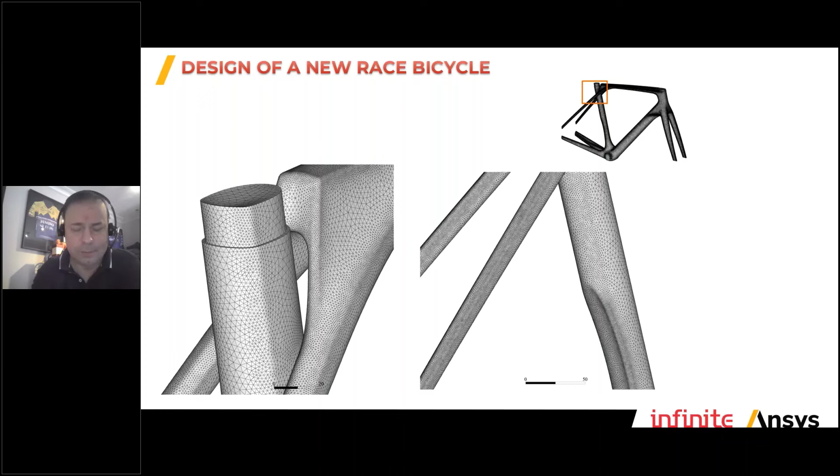Here I will not spend too much time. We have been working with Lapierre, and we're still working with them now for designing a new race bicycle. That's also done with CFD, almost exclusively with CFD actually. There's a lot of details being focused on here, so it requires a lot of computational cells, but it gives very valuable insights. It's a bit complicated because you have all these different tubes and components impacting each other, and when you get a gain on one tube, it might be a disadvantage on another tube, and so on. So it's an intensive iterative process.

There's also a movie of that made here, but it's without sound, so I will not bother you with that. I will go to the last part of the presentation, and this was actually a project that was a lot of fun.

At some point we were asked by Mathieu Heijboer, the performance manager of Jumbo-Visma, to work towards an optimized team time trial sequence for the 2019 Tour de France. Because if you have 8 riders riding in a time trial in a certain sequence, you actually have 8 factorial number of sequences, so that's 40,320. You can imagine we cannot test 40,320 sequences in the wind tunnel, or even with CFD, but at least you can calculate a few. There were specific orders where Mathieu Heijboer wanted the result, and indeed some of these orders are much faster overall than others, and it's very difficult to determine that just based on intuition.

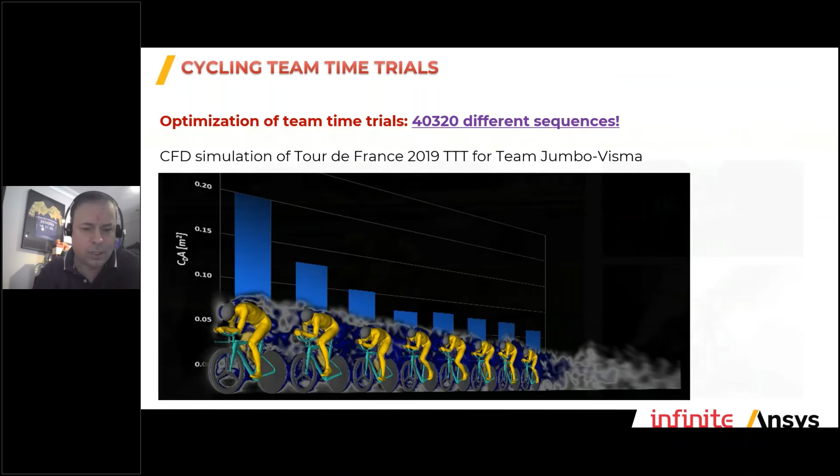So we calculated that for the team, and finally an optimized order came out of that. That was, I think, one of the races I've been watching where I was most nervous, but the team did a fantastic performance there, and they beat Ineos by 20 seconds. Ineos was also widely known as the best team in the world at that moment. So that's really, really nice.

And of course, this optimized sequence is just one piece of the whole puzzle. As researchers, I always say we have to be modest. You contribute a very little bit to this kind of achievement, because the biggest piece of the puzzle, of course, are the riders and all the other aspects that go along with that.

But it's very nice then afterwards to see the joy of these guys, and I really have to thank Mathieu Heijboer here. We've been working together with him for 5 years now, and it's always very enjoyable and very pleasant.

Conclusions. What I wanted to show here by showing you a number of different applications is how important computer simulation, CFD, has been in each of these applications. We've always used a little bit of measurements, but measurements are often very time consuming, and you can only do them for a few configurations. We need them for validation, and then you can use computer simulation to really explore the physics of a given problem.

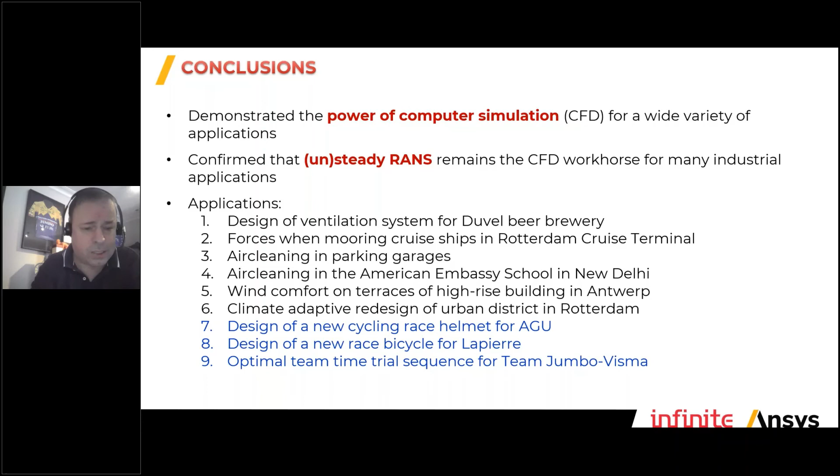I also recently wrote an article about that, to indicate that it's not always required to go to scale-resolving simulations. Sometimes yes, but not always, and we should not make our method more complicated than it needs to be.